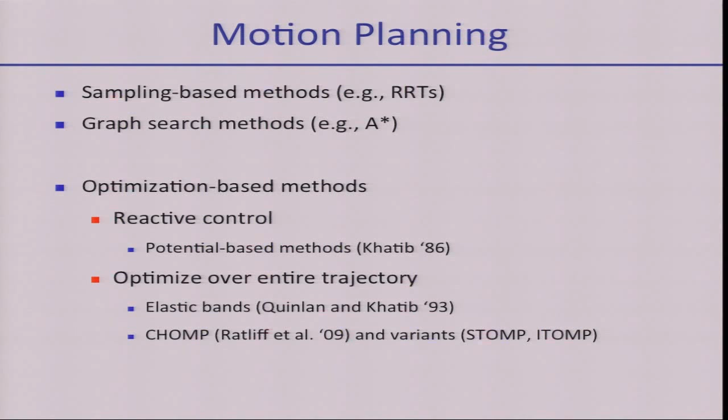So what do these methods look like? In the optimization, you minimize some objective, let's say path length, so the sum of the squared distances traversed at each time step, maybe some other costs.

Initially, your joints are in a start state. At the end, your joints need to be such that your robot is in the goal set. There are some joint limit constraints. And then for all robot parts and for all obstacles, there should be no collision along the path that you want to execute. This latter one is the hard one. This makes the problem non-convex and makes it computationally more challenging to solve this problem.

In recent years, there's been a lot of work on sequential convex programming. And the idea there is that you solve a non-convex problem by locally approximating it by a convex problem, solving the convex problem locally within a region, then updating your convex approximation, iterating over this until you reach a local optimum of your original problem.

The tricky part here is to incorporate the no collision constraints into these sequential convex programming methods. And so here's one way to do this. If you had one robot link and one obstacle, you could characterize the distance between them.

The signed distance is how far you need to move to get two objects out of collision, or if they are not in collision, how far you need to move to get them into collision. And you could then penalize as a function of the signed distance, where the penalty is 0 if two objects are a safe distance apart, and penalize more and more as they get closer to collision and even higher when they are in collision.

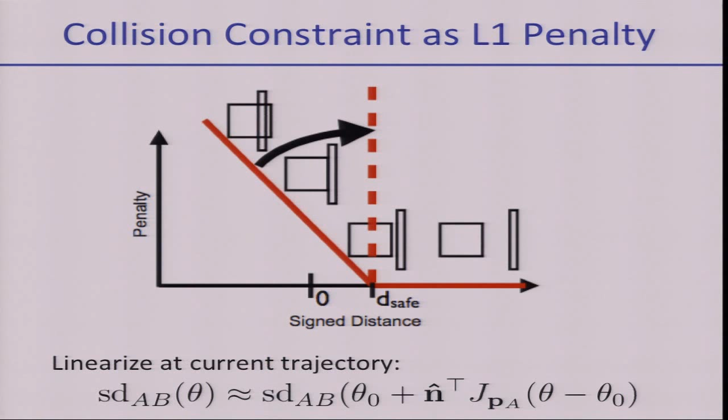If you want to account for collisions over time, so from time t to t plus 1, you could sweep out the volume that's being traversed by each link of the robot, and then do the collision check on the swept out volume rather than on the shapes at time t and t plus 1 separately.

It turns out that aside from this being better in terms of avoiding collisions over continuous time, it also turns out to condition your optimization problem in a better way, and you end up finding better local optima because now you're more fully considering the trajectory rather than a discrete set of points along the trajectory. So you really end up reshaping your trajectory as a whole.

Now, with these local approaches, of course, there are no guarantees. And so the way to justify that they might work well is to build up a benchmark where there's a large set of test cases and see how often they succeed within a certain amount of running time.

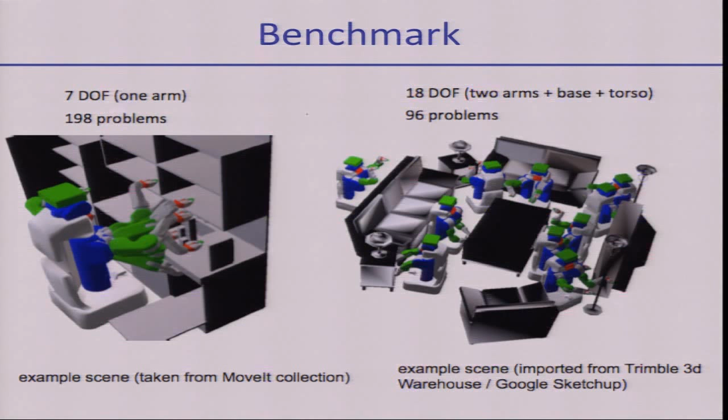So we set up a benchmark with PR2 being required to do a variety of motion planning tasks, and compared this optimization-based approach that we worked on, which we call TrajOpt, with some of the state-of-the-art methods, bidirectional RRT, and CHOMP, which is also an optimization-based method.

We see that with this TrajOpt local optimization approach, you can actually solve quite a few problems—in fact, more than with RRTs, if you're restricting yourself to a finite amount of running time.

We've done experiments with other robots than PR2, all in simulation. We've looked at the Atlas robot, 34 degrees of freedom. We've had successful experiments on box picking with a robot modeled after the industrial perception setup that Kurt and Gary had at the time, and also curvature constraint planning, such as you encounter for needle steering.

You can try this out yourself. The code is available, and not just the code, but also mini tutorials are available to work with this code. You can try it out on many different examples. So that's the motion planning part I wanted to talk about.

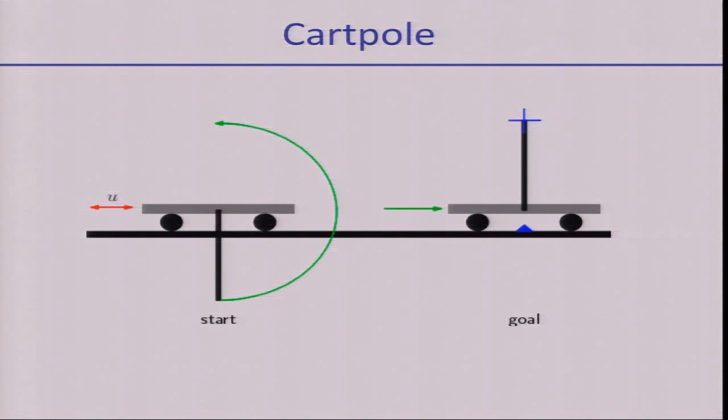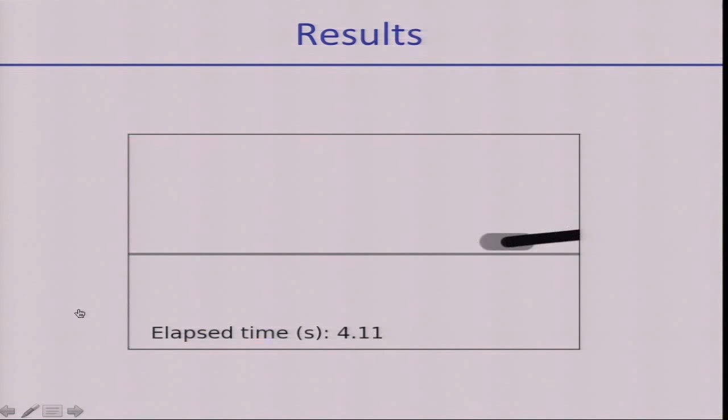If you run the algorithm described on the preceding slide, this is what you get. At this point, it's building up its model, trying to get to the goal. Optimistically, it always thinks it's going to get there, but actually doesn't.

But then after about 10 seconds, it figures out how to swing up and get to the goal. Here's a little more statistical information: if we do this over 10 runs, after about 40 seconds, each of these runs has succeeded. The reason this is not deterministic is because the first 10 seconds of the run, we apply stochastic control inputs.

So there's just a stochastic sequence of control inputs. Initially, things are random, and then from there on, it starts trying to find the best path to the goal under an optimistic interpretation of the current model.

Right now, what we're looking at is whether we can extend this computationally from 2 degrees of freedom to 6, which is what we would need to have a helicopter learn to fly on its own. Thanks.

Our next speaker is Konolige from, I don't know, are you still at Industrial Perception? I am at... Industrial, are? Perception. From Industrial Perception. It does seem to work.

My career path has probably been a little bit different from most people, and I know there are a lot of grad students here, so don't take this as a tale to be followed. You probably want to do things the inverse of what I did, which was to work at SRI International for longer than I care to think, doing mostly DARPA projects, which were very interesting.

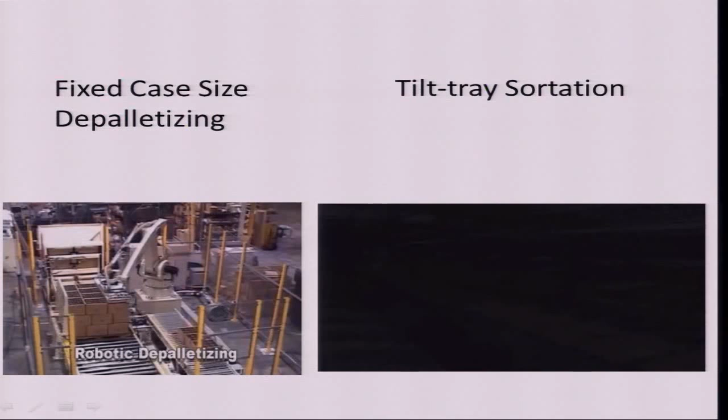For instance, this kind of depalletizing doesn't have any sensing—you just have to know that everything is actually there. The typical situation tends to have a lot of, for sortation, for instance, for trying to distribute packages, companies invest in these very large warehouse systems that are very inflexible, again with hardly any sensing going on here and certainly no vision.

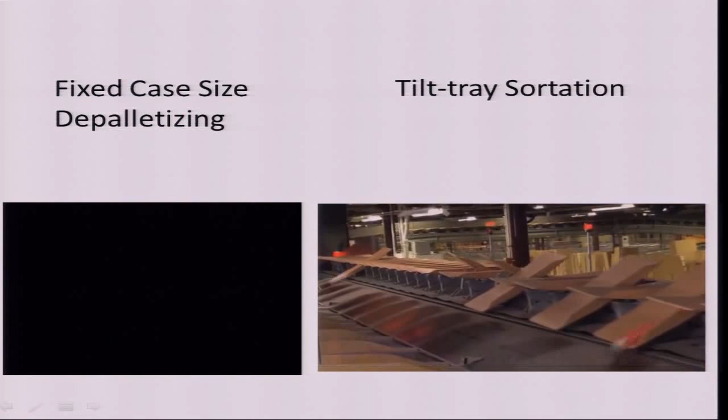So we looked around for applications that could actually benefit from vision, and we found really interesting ones. For instance, one of the largest uses of robots, and one of the first uses, was in welding for cars. But it turns out that every now and then the welding tip will hit something and get bent, and you have to try to figure out where it got bent to.

They currently use single laser break beams. It takes a while to actually do that. They tout 2 lasers as being a real advance in the field.

We figured we could just do this by looking at vision, and indeed, if you just look at that with a camera and take several images, you can pretty much localize where that welding tip is, and that's what that video showed. But of course, the venture capitalists would laugh at us if we came to them and said this is what our application is. In fact, some of them actually did laugh at us. It was quite funny. And we eventually settled on a different application.

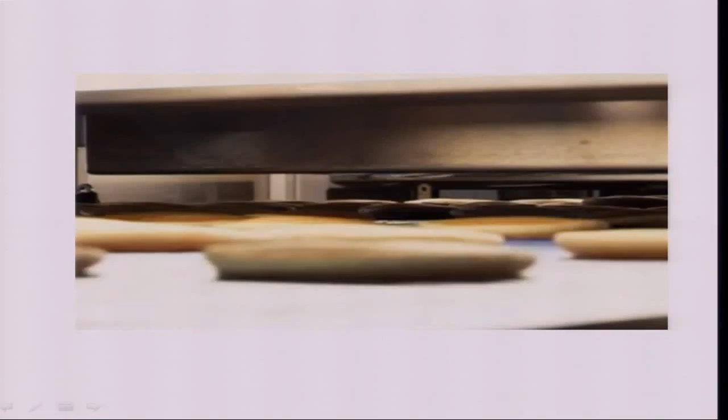But let me say first, it's not like vision and robotics aren't used in industrial automation. For instance, almost all your breakfast foods are handled by a robot at some point.

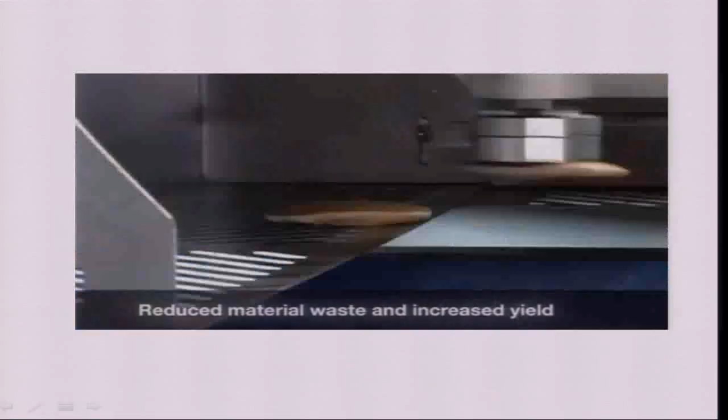So think about that the next time you eat pancakes. They're handled very well, but the kind of vision you get here is very much 2D. There are companies like Cognex, very large companies that do this stuff, especially for things like quality control, and they do really well.

So we realized there were other applications that were not so well controlled. We settled on doing box picking, trying to pick boxes from trucks. This is one of the videos from an early experiment we actually did. Here the environment is somewhat controlled - you're in a truck, you know you have boxes maybe of a certain size, but you still don't know quite where they are.

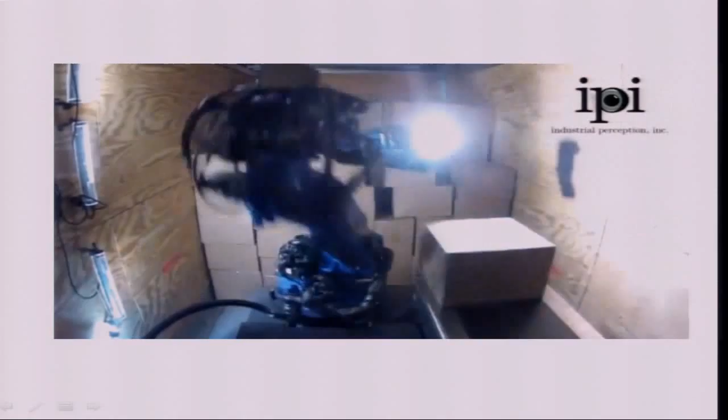In fact, we started out as a perception company trying to find the boxes so that another company, Wynright Robotics, a robotics integrator, could actually perform all the motion control. We just kind of throw the coordinates of the box over the fence to them. They would perform the motion control and actually pick up the boxes and put them on the conveyor. I don't know if you can see it, but the boxes shake every now and then. There's a lot of dynamics going on here that we don't really model, and probably should at some point.

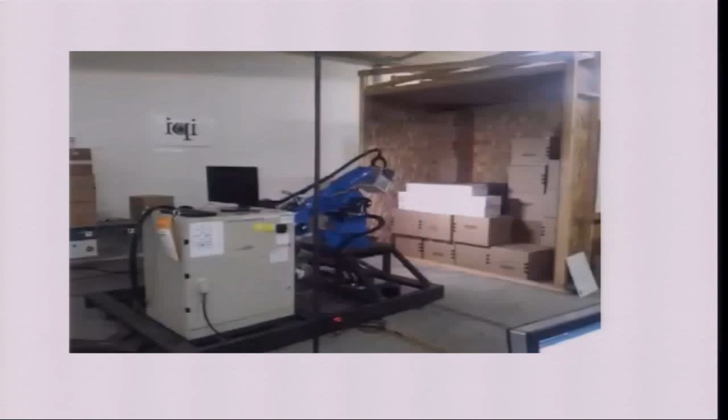We realized fairly early on that we couldn't just be a vision company. The reason is that the motion itself - if we want to get very fast, in industry speed is of the essence. You have to get down to about 5 seconds a box pick to make this actually viable. And if you just work with current robot technology, that big controller box right there handles everything.

Yes, this is our famous box throwing demo. You can find this on the web. You'll realize very quickly that robots can be programmed to go from point A to point B, but you can't tell them how to get there. There are very few ways that you can actually tell them to do that kind of thing.

So very quickly we learned that we had to take our perception, and if we wanted to be efficient, we had to pair that up with motion control - both for active vision, for finding where we wanted to look, and also for making efficient paths that would let us go around. So over the last year or so, we've had to actually do that part of robotics, and we've teamed up with Pieter's group and John Schulman in particular to help develop some of the motion control and optimization of trajectories for robotics. That's been a very interesting journey.

Unfortunately, we can't be 99% sure of these things, or 98%, because if you actually have that robot knock into something, then of course you're screwed. So the requirements for industry are quite a bit different.

So there are a number of things that we actually needed to do. First of all, we needed to take 3D seriously. In this kind of environment, if we don't want to hit other boxes, if we want to be sure about our trajectories, we have to have a full 3D model of the environment, and we have to constantly update it at the same time. So we had to really take that seriously.

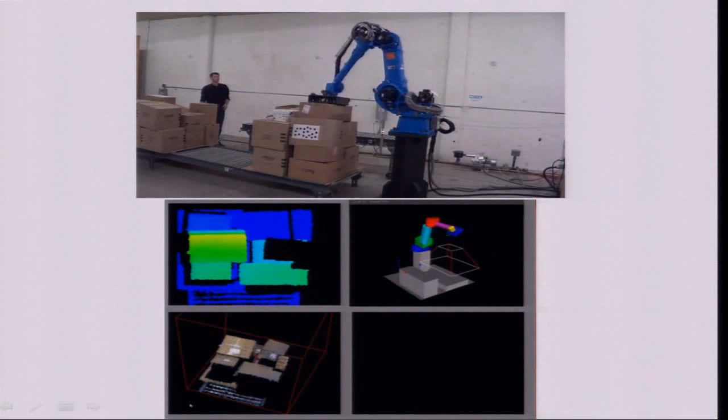So here's one of the first applications where we actually looked at taking seriously the notion of 3D and update of the 3D model.

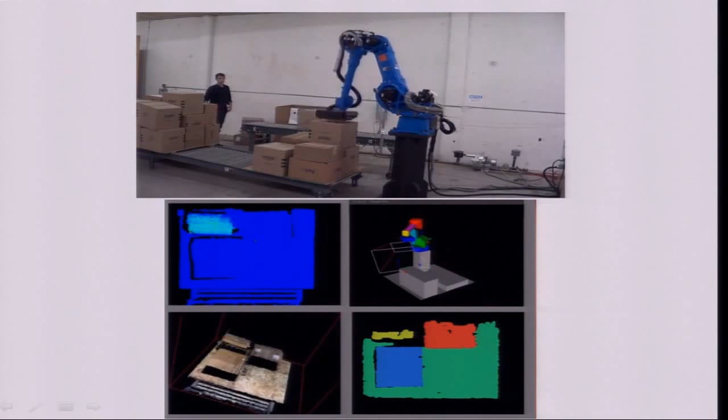So you can see it's a very simple model, and we're just using a camera on the end effector of the robot to update that model in depth and find the next box as we go through a cycle of picking this up. It actually showed that we could pick these pallets with boxes of different size fairly easily and fairly quickly.

The only stops that are actually in here are because we're using a Kinect-type sensor, and if you move while using a Kinect sensor, you're going to have a lot of motion blur. That's a real problem in getting cycle time down fast, because you don't want to have to make those stops to settle down.

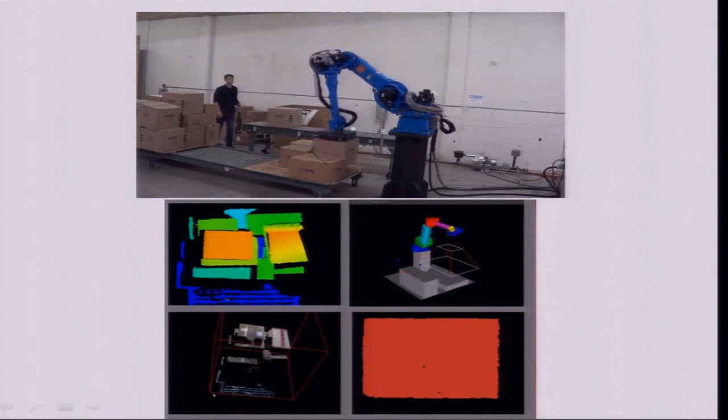So we've had to overcome a lot of these different problems, and part of that led up to our current system, which is able to do full volumetric modeling of the environment, update that in real time, do more precise localization and volumetric rendering for actually finding boxes. There's a couple boxes that are somewhat hard to find, and we do that all in real time while still enabling us to pick in these very tough situations.

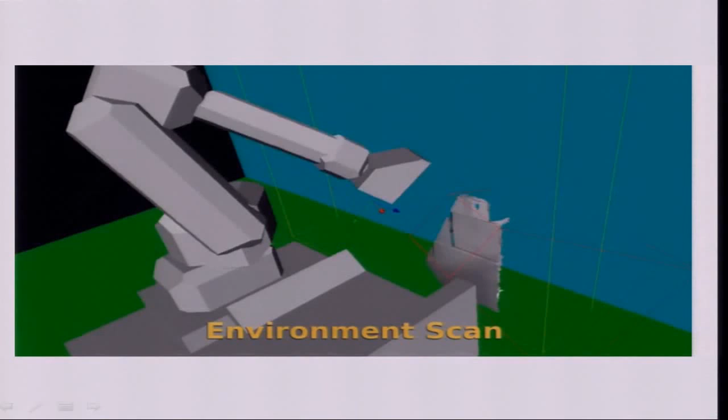So here's a little bit of an idea of what the robot is actually thinking. As it scans the environment with a depth sensor on the end of the camera, it's building up that 3D model. So now we can use this to do collision detection. How to do that in real time is actually really still difficult, but it involves...

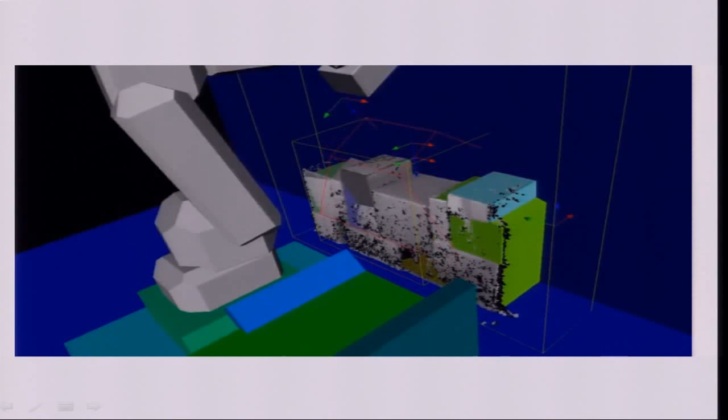There are no questions allowed during these talks.

It's a magic sensor. You can come talk to me afterwards, and I'll talk to you about it.

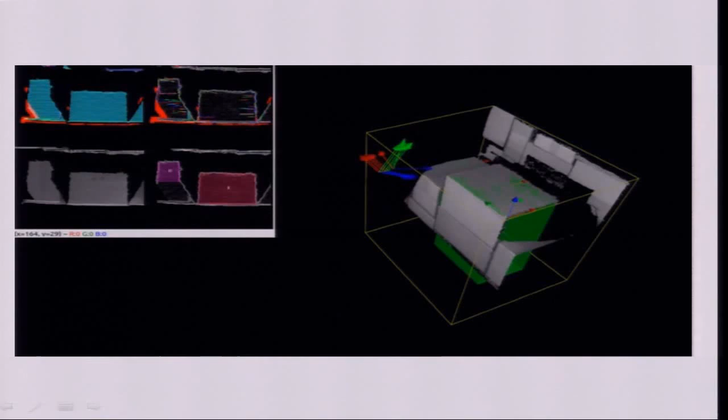So you can see it building up the environment. I'm not going to have time to talk much about this, and I urge you to go on the web to find some of these videos and see what else we're actually doing. Okay, thanks.

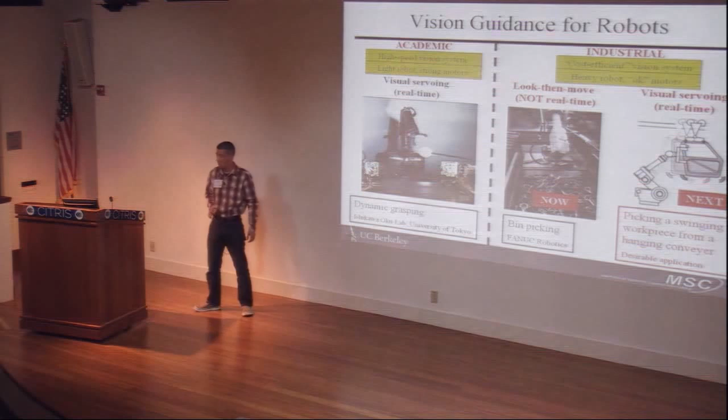So to implement real-time vision guidance on industrial robots, basically we need to consider two parts of dynamics. Control is always about dealing with dynamics. Of course, we always have robot dynamics. And another dynamics we have is the so-called visual sensing dynamics, or VSD, which mainly includes latency and slow sampling.

Talking about latency, usually a common vision system used by industrial robots gives that kind of latency, whereas we're talking about at least a 1 kilohertz controller rate.

It is not an image camera. It requires markers. And it gives you pretty fast response and sub-millimeter precision accuracy, with a considerable measurement range, like half a meter by half a meter. And the pro is it's really, really affordable.

If you're trying to buy something like that on the market nowadays, it costs you around $100K US. Examples include Optotrak from Canada, whereas our system, I believe, gives a cost lower than $1K US. But the problem is it requires markers.

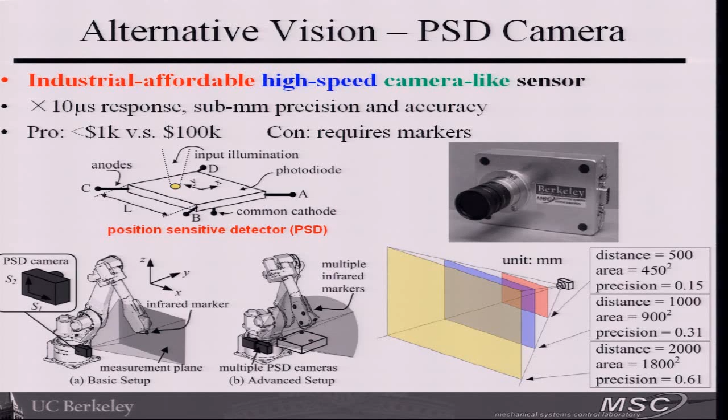So what if markers are not allowed? What if manufacturers don't have time to attach markers on their workpieces and tools?

We have to deal with visual sensing dynamics directly with some sort of smart algorithms. In our controller, we have this dedicated block that compensates for the latency and slow sampling coming from your cheap camera, so it's compatible with your 1 kilohertz controller. In visual sensing dynamics, we have three things.

Noise, which means we need to use some sort of statistical algorithm. Latency, which means we need to predict. And slow sampling, which indicates multi-rate algorithms.

Nowadays, my colleague has developed a series of algorithms based on various learning methods, which is really marvelous. But basically, most of those algorithms predict today by reading newspapers from before yesterday, by learning some sort of model.

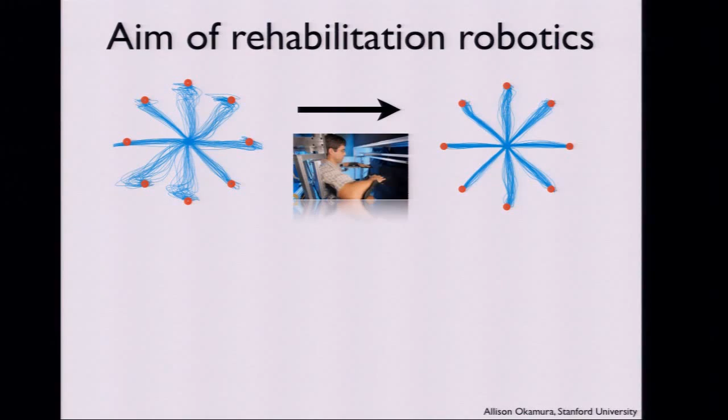The larger goal of rehabilitation robotics is: if you have someone making irregular and variable movements, somehow using a robot, either as an assistive device or as a rehabilitative tool that would only be used temporarily and then taken away, could eventually produce nice, smooth movements like controls or healthy people do. In the long term, you'd love for these rehabilitative tools to transfer recovery to activities of daily living, to be used at home as orthotics or rehab devices.

Ideally, you don't just want some specialized strategy that helps people, but you want to truly help them learn and correct their behavior at a fundamental level. To do this, we need really good models and an understanding of the patient deficits.

A lot of the rehab robotics field is about building devices that move people's arms around in a way we think might be helpful. But to be truly helpful, we postulate that you really need to understand the deficit.

In this talk, I'm going to talk about using robots to help us understand the deficit, specifically for people who have damage to the cerebellum, which is a part of the brain located back here.

It's thought by researchers to house an internal model of the body's dynamics—my limb segment lengths, inertias, maybe damping, etc.

This is thought because if you take a healthy person and ask them to make a quick reaching movement, one so fast you can't use peripheral feedback, which takes about 150 to 200 milliseconds for proprioception or vision, requiring a feed-forward motor command from an internal model, a healthy subject can do this task pretty well.

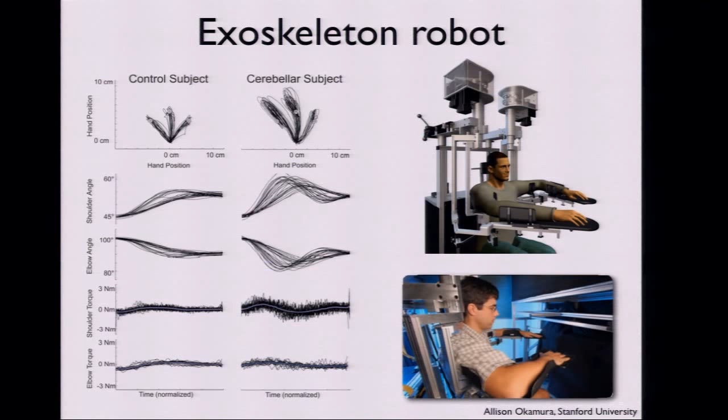So a control, healthy subject might make movements like this. This is spatial, and then this is the inverse dynamics, getting all the way down to what we think are the torques in the arm that resulted in those movements. We can also do this for cerebellar subjects. The interesting thing is it definitely seems to be dependent on where you move in the workspace, giving more evidence that this probably has something to do with the body's dynamics.

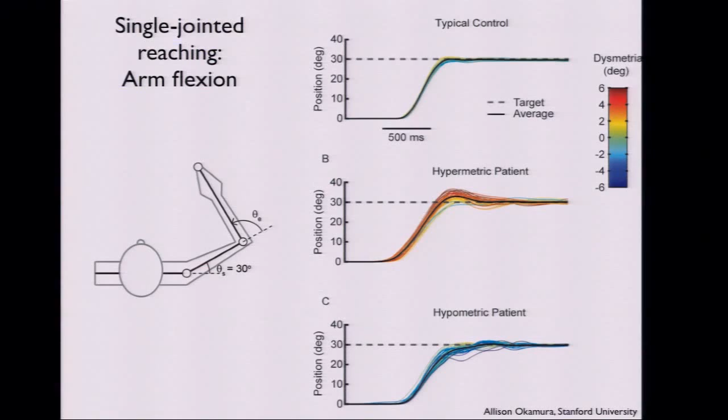So we tested people in a very simple single joint flexion task, moving the arm in and out, and we get data like this. If we're just looking at position, this angle in one degree of freedom, and you're moving up to this target line, control subjects can do this very well.

The interesting thing, and this has been a mystery for decades, is why some patients with damage to the cerebellum overshoot as they try to hit the target, whereas others undershoot. This hypermetric patient overshoots and oscillates, coming back in this sort of weird underdamped behavior. A hypometric patient has a different type of dysmetria: they undershoot, and then finally recover and can get near the target after a little bit more time.

So we would like to understand this more deeply. One thing we would like to do is take healthy people and see if there's something we can do to them with a robot that can make them look like cerebellar patients. And we were able to achieve this by trying to mess with their body's dynamics.

So we would have healthy people make these reaching movements, and then we would use the robot to suddenly change their inertia, increasing or decreasing it. And we weren't sure that inertia alone was the problem, so we also tried viscosity, stiffness, and some other things.

Now with a healthy person you can only do this once, because if your brain can adapt to these deficits the robot is introducing, you won't get much good data after a single reach. But for these single, unexpected reaches, we actually get this variety of hypermetric and hypometric behaviors from these perturbations. And it looks like these are very similar to what we see in cerebellar patients.

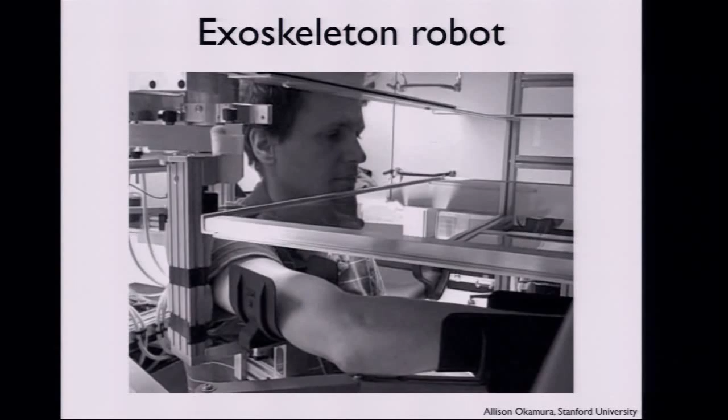We basically do inertia rendering on the robot, which is challenging because you're trying to get the device to output torques, which are a desired inertia multiplied by an acceleration measurement. There are interesting signal processing issues in trying to render these inertias precisely, but we have to do it in order to render the correct inertia to change these deficits.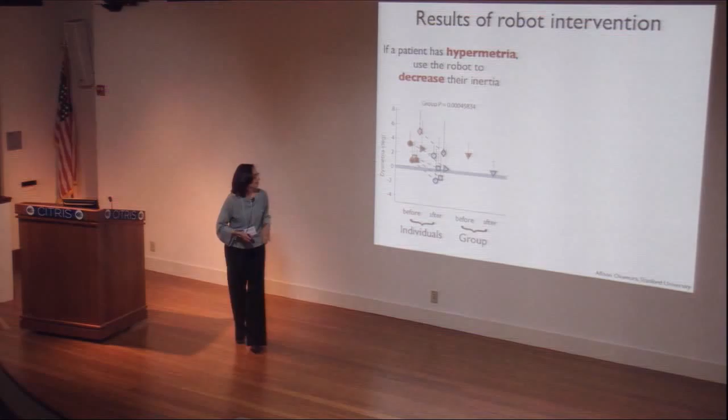Hypometria was the case where you were undershooting, and this actually works there as well. Their dysmetria was higher before and we can correct it, and the group data does pretty much the same thing. So it's interesting that we could apply this general idea to patient populations whose behavior was quite different in terms of the type of error they got.

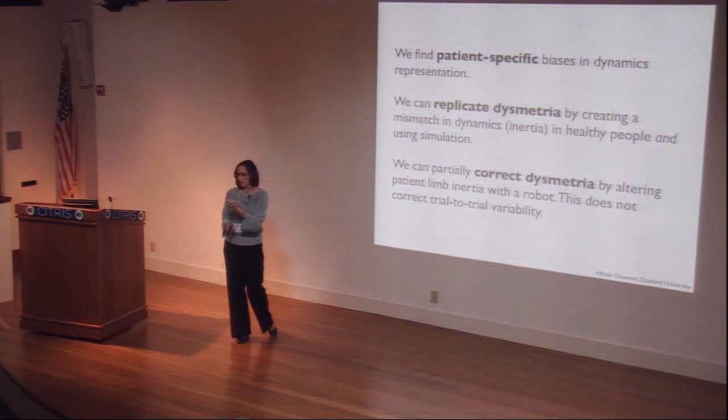The punchline results are that we can use patient-specific biases to represent their dynamics and understand them. We can replicate this dysmetria in healthy people using a robot to perturb them, as well as in simulations. We can also partially correct the dysmetria by altering a patient's limb inertia using an exoskeleton robot. This is exciting, but of course this is only scratching the surface. It doesn't correct trial-to-trial variability, and variability is higher in cerebellar patients than in healthy people. That's still a challenge we're working with.

The big picture here is that, like surgery or any other robot-assisted intervention, in rehab robotics we should be able to quantitatively describe a patient's state in order to generate a model, so we can plan intervention, design robotic systems, and incorporate human inputs into them.

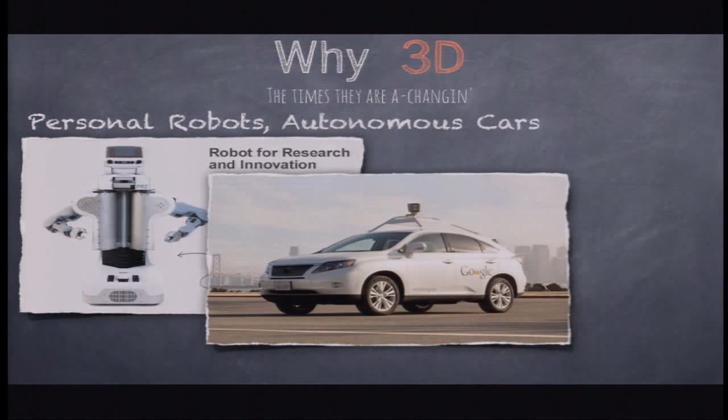A little background. I'm going to start with why do we care about 3D, and then move into what is the point cloud library. So why do we care about 3D? Well, times are changing. Personal robotics is on the rise. We've got cars driving themselves. And wearable computing is also coming. All of this means that 3D visualization and handling is going to be increasingly important in the next few years.

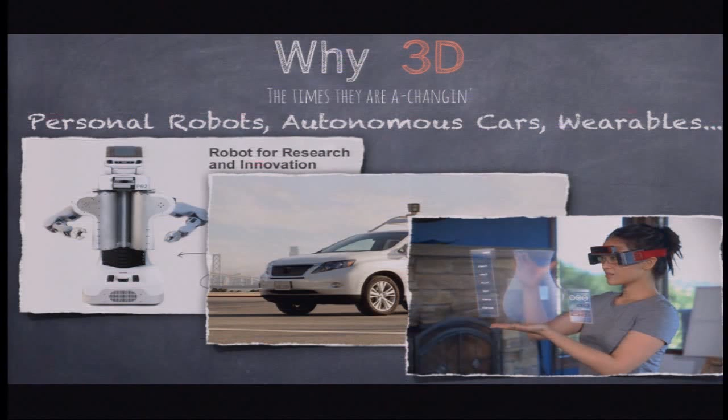Also, because 2D alone might have failed us - and that's not to be mean to the people who have done great research here. But if you look at something like Google Goggles, a great company doing great work in 2D, the public just isn't convinced by it. And that's not surprising, because it's really hard to solve the 2D problem.

Lighting invariance is very difficult. Mapping texture as opposed to shape is a big problem. And even some of our best algorithms in tracking, without the ability to do geometric verification, are going to find mugs out in space. When you just have edges, that's what you have to work with.

And even the algorithms that are tried and true will still fail sometimes. Also, I think 2D is just hard without semantic understanding, a little ill-defined even. For instance, without depth perception or a really good understanding of how humans behave, you just can't work with this.

Also, being biologically inspired isn't always the best way to go when we're working with a robot here. So I know humans use mostly monocular, a little bit of stereo. But if we have these sensors, we should work with them.

Also, because this is a convergence of a lot of fields right now. So we've got new sensors coming out - PrimeSense, Intel, gaming and mobile. And pretty excitingly, a lot of these will be embedded in a phone very soon. They're working on camera arrays, passive stereo, and we're going to have to deal with this data.

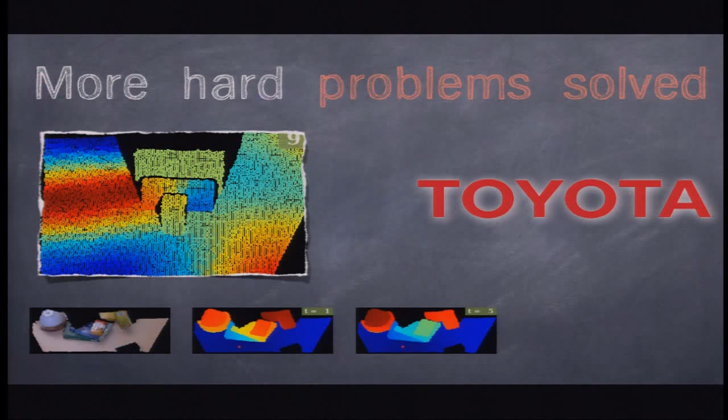And finally, we've been working with NIST to try to do multiple human pose tracking. So this is with a mounted Kinect sensor, just trying to follow people, again, with heavy occlusion. And this is still ongoing work. So I think I'm a little short, but you should come join the movement at pointclouds.org. It's a great library, and we need your help.

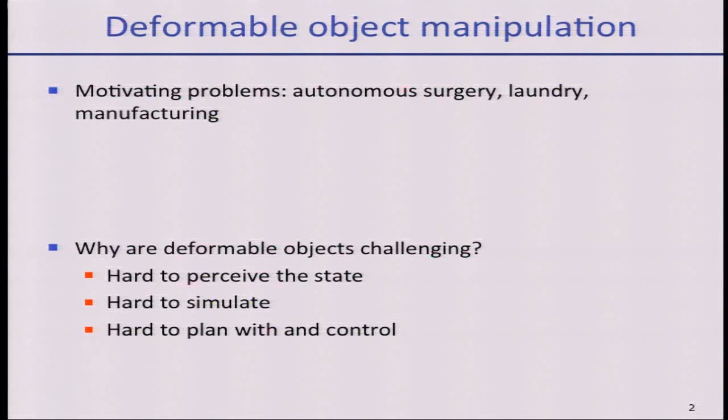So my research has addressed a few aspects of this problem. I did some work on tracking deformable objects and then high-dimensional motion planning. But the next few minutes of this talk will be about learning from human demonstrations how to autonomously do a manipulation task.

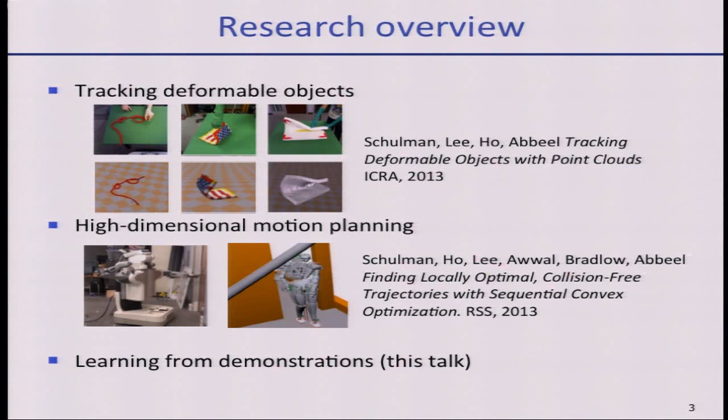So what you can do is first find correspondences between the points, and then think of those as samples. You have a function, a nonlinear coordinate transformation that maps from the training scene to the testing scene, and you have a few samples of that function. Basically, we're going to fit a function that maps the whole space of the training scene onto the testing scene.

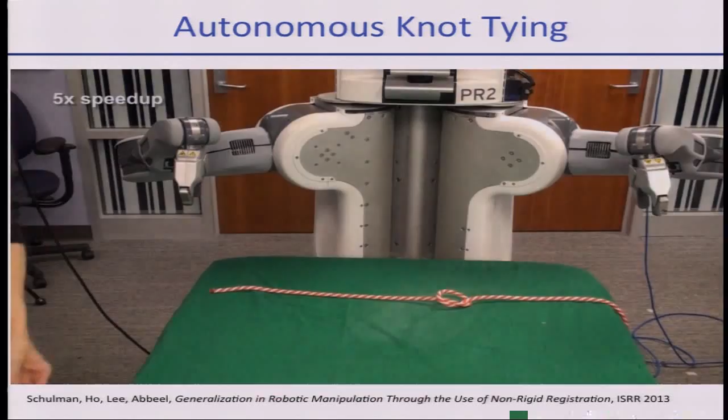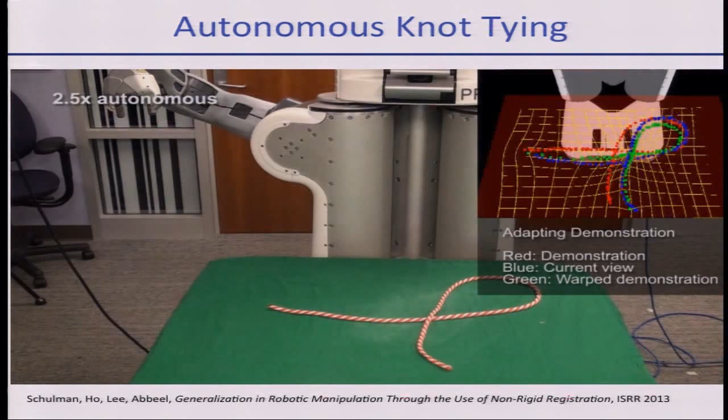Three stages there. Now the rope is laid out in a new configuration, and the robot's going to tie a knot autonomously. At each stage, it looks at the rope, gets a point cloud, and does non-rigid registration, meaning it finds the function that maps the training scene onto the testing scene. It does that three times, once before each step, for the overhand knot.

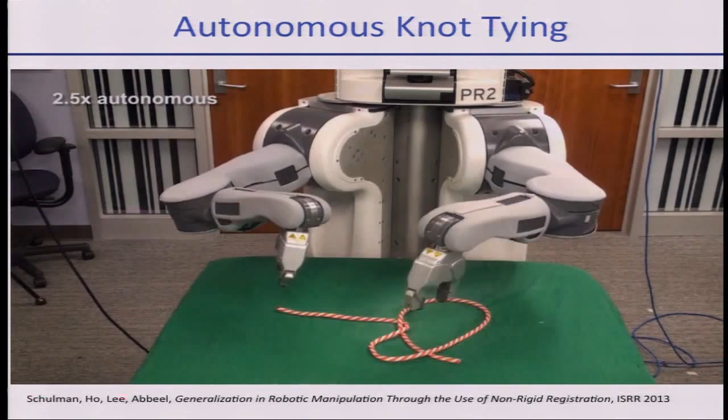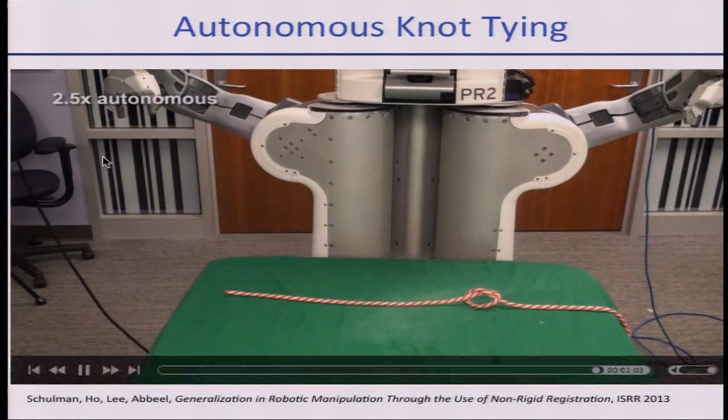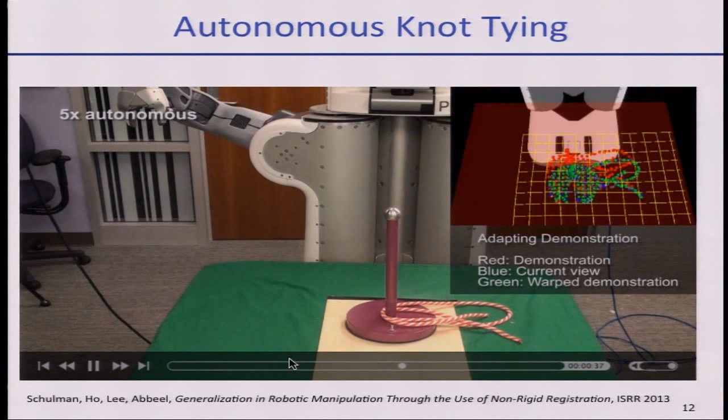Here's a slightly more complicated knot. Same algorithm, exactly the same, just with a different demonstration. This is all in 3D, even though it's just showing it in 2D. With the rope, only 2D is relevant, but this also works in 3D.

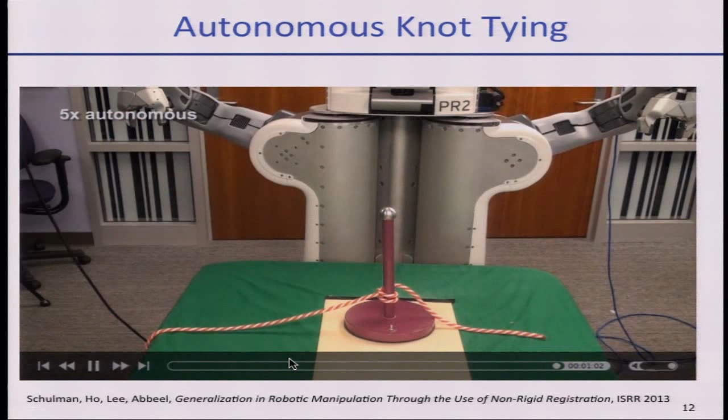All right. Thanks for your attention. Thanks, John.

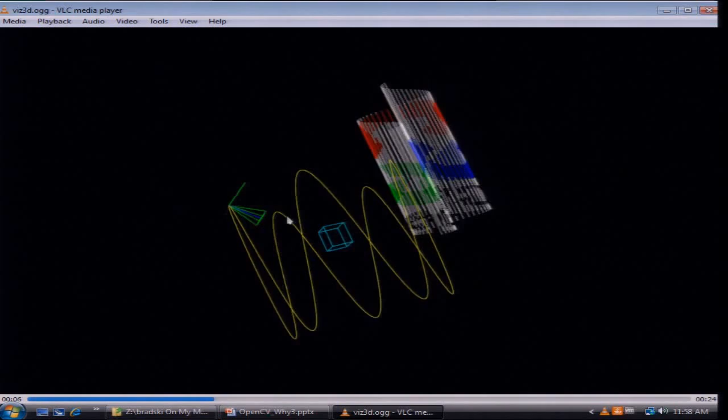This is the visualizer for structure from motion, so it's following this sinusoidal arc, and you're able to view this. In this case, he's just making a camera path. So these are some of the things that came in.

And hopefully that one's not. This is the Python tutorials, complete tutorials. Maybe I can speed this one up as we're running out of seconds.

And I wanted to get to this segmentation that was developed by Malik and his group. So, very human-like segmentation.

So that's all in there as of now. You can get it on Git. That's it. Thanks, Gary.

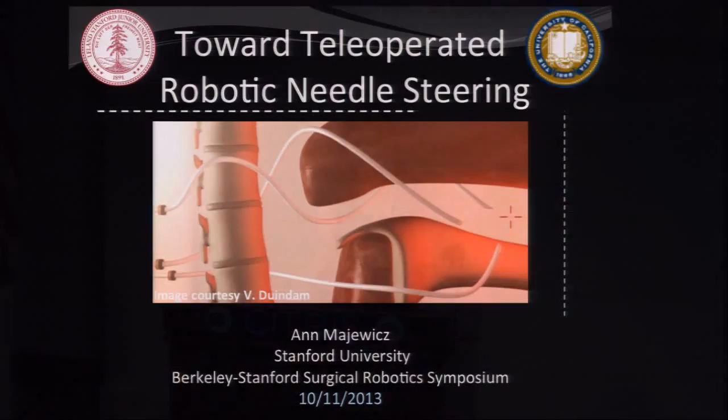Hi, I'm happy to be here, especially because we've actually collaborated a lot with people at Berkeley on the needle steering project. My name is Ann, and let me just start with a little bit of motivation for steerable needles.

The motivation is that straight line paths don't always exist to targets within tissue due to obstacles, such as in this case, we have a little vessel that's blocking the path. So steerable needles could be used to steer around these obstacles.

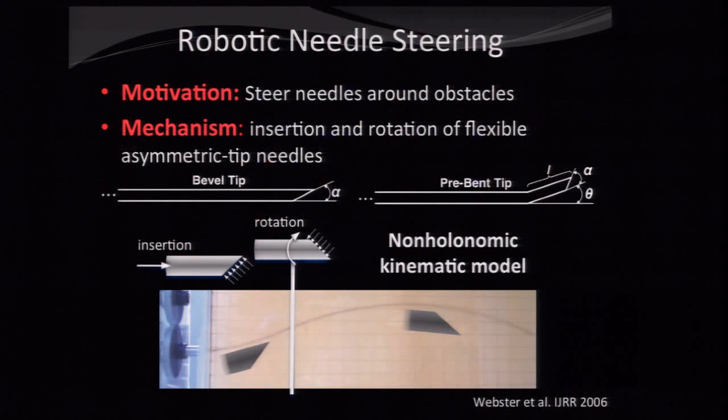So we use long, thin, flexible needles with asymmetric tips. As the needle inserts, it deflects due to asymmetric tip forces. Then we can control where the needle steers by rotating the needle. We can actually model this behavior as a nonholonomic system, such as a unicycle.

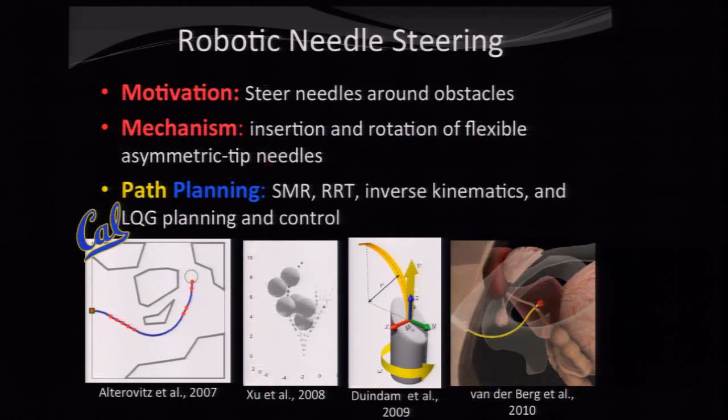We collaborated closely with people here at Berkeley, particularly Ken Goldberg's group, and they've contributed a lot to path planning algorithms that enable autonomous needle steering. However, there are several challenges with autonomous needle steering, namely limitations in terms of medical imaging, dynamic intraoperative environments which can cause the operative plan to quickly change, and finally, how the tissue feels is actually a critical feedback mechanism for the surgeon to detect what kind of tissue the needle is in. And so for these reasons, we think it's important to have a surgeon in the control loop.

We're proposing to do this with a teleoperation strategy using a haptic device like the Phantom Omni. And so we considered two possible teleoperation strategies.

The first is having the user control the needle inputs, insertion, and rotation, and this is called joint control. However, we actually thought this would be kind of difficult. Just imagine how hard it would be to parallel park a car in 3D. That's sort of what this would be like.

So instead, we proposed another method where the user controls the needle tip directly, and that's what we call Cartesian space teleoperation. Our method works by iteratively planning constant curvature paths to connect the user desired position to the current needle tip position, and then steering the needle along that path.

And because we're using a haptic device, we can give force feedback to the user so they can feel the kinematic constraints, and we might also be able to play back the tissue so they can feel the tissue as well. So here's a video of a user teleoperating a simulated needle using Cartesian space teleoperation.

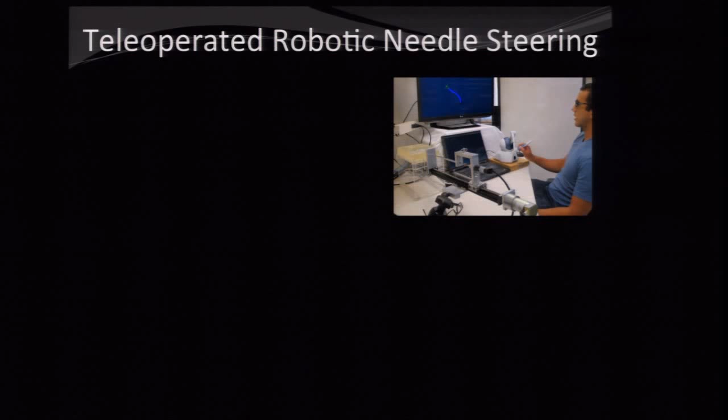So to implement this with a robotic system, as the user moves the haptic device along the desired needle path, we iteratively define constant curvature arcs between the needle and the user desired position. And the needle position and heading can be found using a 6-degree-of-freedom electromagnetic tracker.

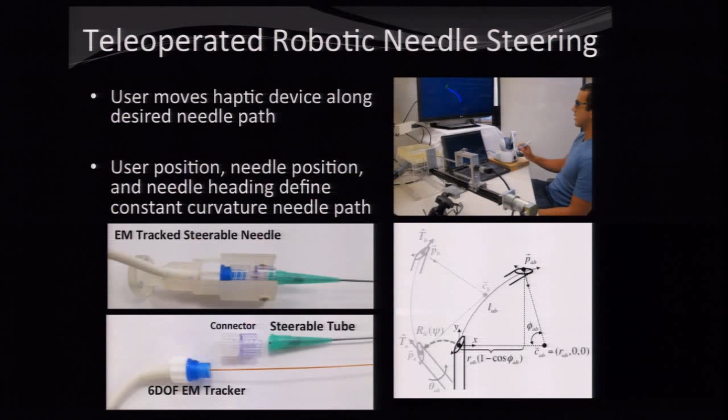Then we steer the needle along that path by first rotating the needle to the steering plane. The needles steer in 2D. And then control path curvature with something called duty cycle spinning. And then we repeat this process until the user stops moving.

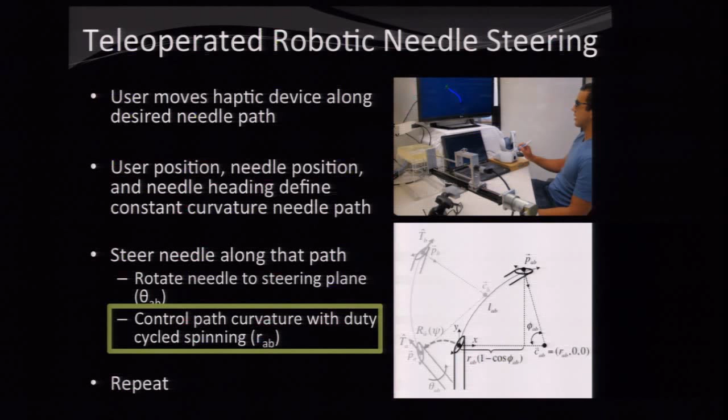So now let me talk a little bit more about how to control the path curvature. In duty cycle spinning, the needle path curvature is controlled by alternating between pure insertion with insertion while continuously spinning. There are two issues with this method. One, which I won't talk about due to time, is that there's inherent error that propagates over long insertions.

The second, very practical issue is that you actually can't use sensors that have cables because the cables will wind up. So we proposed two different methods that don't require continuous spin. One, as the name implies, bidirectional duty cycle spinning, means that we alternate the direction of rotation, either... actually, let me turn this up so you can hear it.

Let me see if I can play that again. So basically, we just alternate the rotation direction, either clockwise or counterclockwise.

And the second method, duty cycle flipping, is basically where the needle inserts in discrete steps, either facing left or right. And then the duty cycle ratio is a function of the time inserted facing left versus the time inserted facing right.

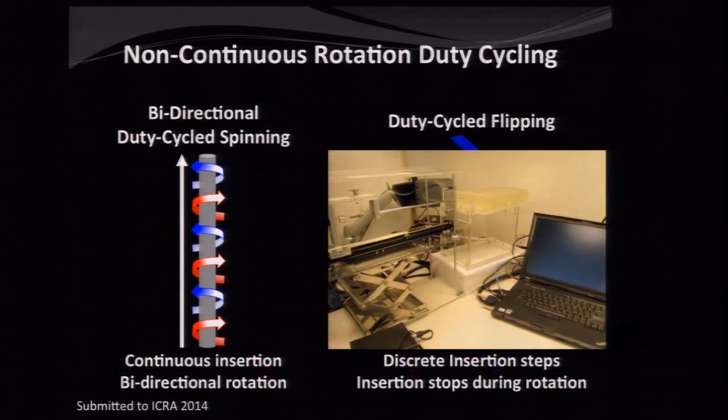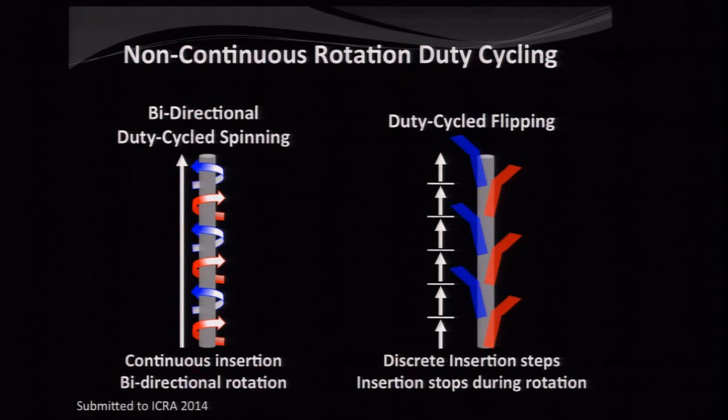We evaluated our algorithms in a paper recently submitted to ICRA. I took out the slide due to time, but I realized I didn't need to. Talking fast, sorry. So basically, we found no difference between the two methods, except that duty cycle flipping has higher insertion force variance, while bidirectional spinning has higher insertion torque variance. That's going to be an issue important to address as we think about implications for tissue damage moving forward. So, thank you.

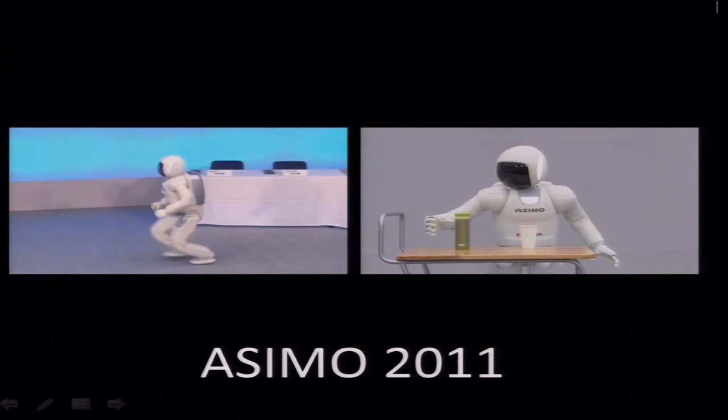So think about this task. In fact, Honda demonstrated this task in 2011, and just programming this task would take over probably 2, 3, 4 weeks of adjustment of all the gains, all the positions, every aspect of it to be successful. And if we change anything in that environment, everything is going to fail.

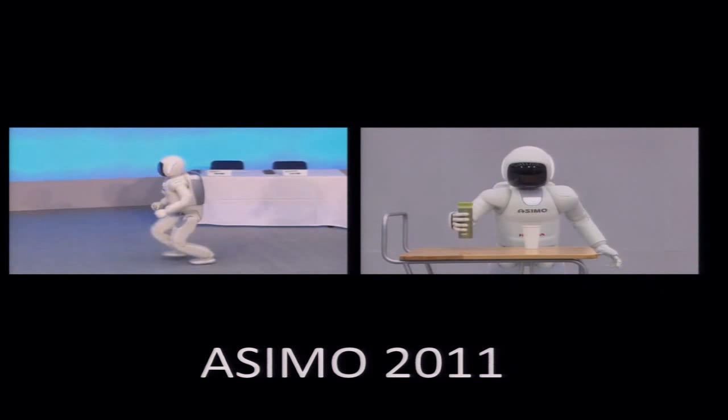Manipulation has been a big challenge in robotics over the years. And in terms of humanoid robotics, it's going to be more and more challenging unless we really work on that problem. So interacting with the world, going beyond manipulation and mobility, and building a framework where we really integrate the whole body, mobility and manipulation, is a very important thing.

So the question is not to take a humanoid robot and try to teach it how that specific robot can perform that specific task. The question is to understand skills independently of the robot, how we can understand a skill, what is a manipulation skill, how we can build that skill, and then map that skill to a platform, a robot, a humanoid robot.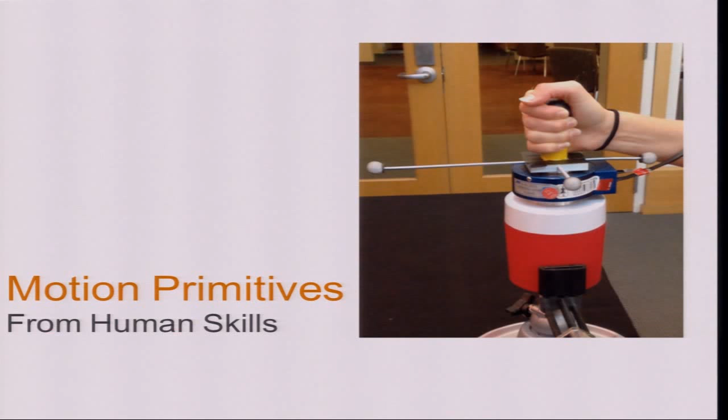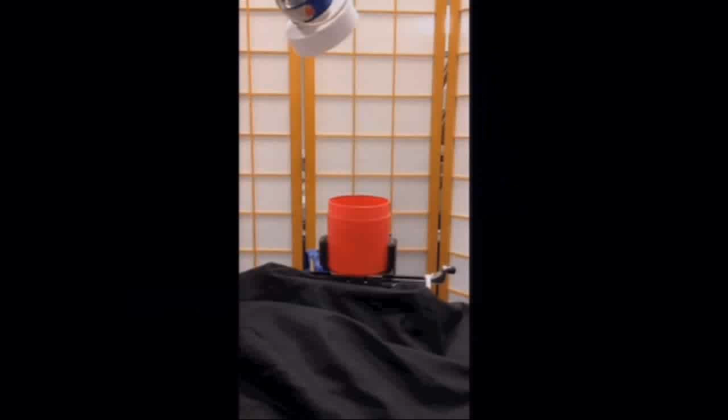So humans are amazing as a model for us to think about skills. One thing we can do is take a task and have it performed by a human, record and motion-capture the motion, look at the strategy, look at the forces and movement, and essentially extract the strategy, extract the compliant frame, extract the center of compliance, and then have a strategy to implement autonomously on the robot.

So this is the direction we are exploring. This is one of the directions. There are a lot of things that could be done haptically. Haptically, we can interact with the environment by controlling the robot. And now the robot is almost autonomous—we are just controlling a few degrees of freedom of that robot.

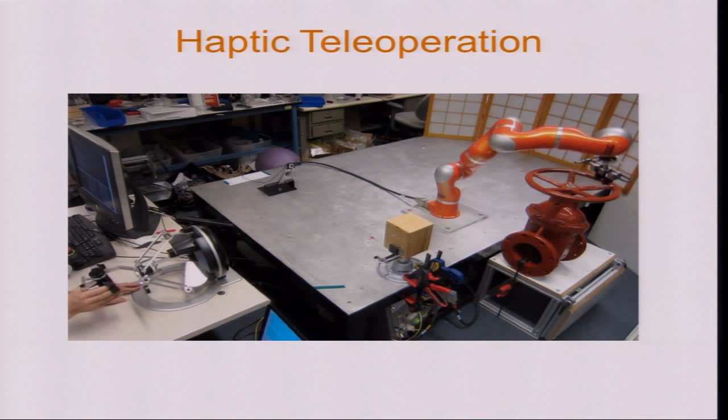So the skills for manipulation are critical. And if we map them to humanoid robotics, now we have a much more challenging problem, because these are systems with many degrees of freedom. When they touch the environment, they will touch it at multiple points, and there will be a lot of internal forces, a lot of balancing questions, and how are we going to control them?

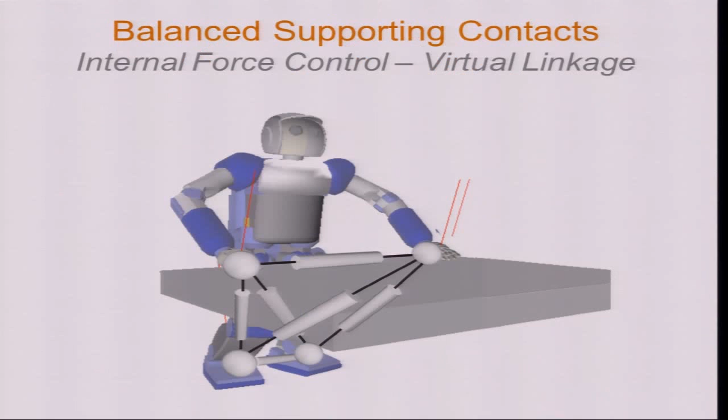Are we going to do inverse kinematics? Is it reasonable to think about inverse kinematics and programming all the different motions for every task? It would be impossible. So we need to understand the model, and think like what humans do. That is, we have multiple tasks we are achieving—we're performing a main task, we are maintaining a posture, our posture will not interfere with the task, and both will not interfere with any constraints from the environment, like contact. Everything should deal with the idea of internal constraints and obstacles and all of those.

Don't forget balance. Now, if we want to do this, it means we have multiple different operators running, and those controllers are autonomous and running separately, but we are merging them through this consistency. Consistency is a sort of projection in the null space of the task, or of the posture and all the constraints, and that leads us to merge and build a controller that is coherent between the different things.

What is interesting about all of this is that it ends up being a very simple point, one single point. All what we see here will result in one single point in high-dimensional space representing the constrained, consistent motions, where all the different parameters related to the constraints are taken into account with the contact and the task. So when implemented, you can see an example here.

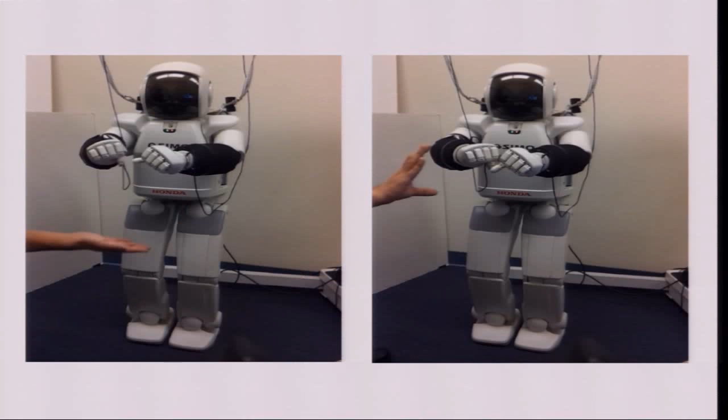And here we are teaching the robot where to reach in order to grasp a specific object. All of these are just examples. So here is an example of constraints. You remember potential field, but now potential field put in the context of not fighting with everyone else, avoiding the collision, and performing a task that maintains all these coherent controllers.

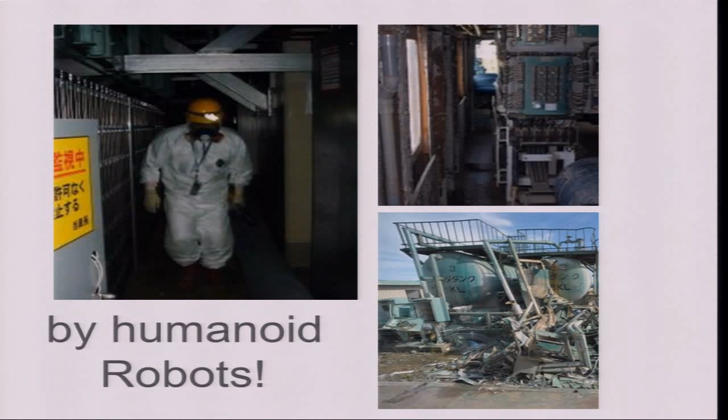Now, let's think about where we can take humanoid robotics. Is it really useful for anything? One thing I think would be amazing is if we could get this human to be replaced by a humanoid robot. Why? Humanoid robots bring this compact mechanism that has mobility, manipulation, vision, computation, sensing, all together in a confined space, so that we can go into these narrow passages.

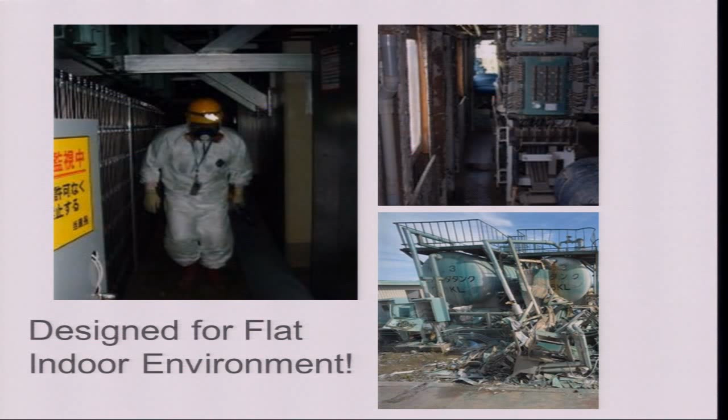The problem is humanoid robots were designed for flat indoor environments. They were not designed for a three-dimensional environment. So how can we deal with this problem? The only way we can think about it is: let's touch the environment, and let's not just ZMP ourselves walking on the flat floor. Let's move using the environment. This idea requires a lot of attention to internal forces, control, and coordination between different things.

Here is an extreme motion that you can see, detecting friction, detecting the slippage, and even moving the ground under the robot, and still we are balancing and maintaining all of this. Once we have the proper controller and proper sensing, it is amazing what can be done.

Now, not every time do you have the environment to help you. How can we move when the environment is not helping? Well, let's make something that will help us move in that environment. This is the concept of the supraped. The supraped is to bring an extension of the support for the robot. We showed that we can do over 400% support.

Now you can see a robot here. This is HRP4C moving in an environment where the robot is detecting, because these poles are smart and have sensors. In fact, we're working with Mark on building such a pole that will provide that feedback and information. In the meantime, we developed the controller, detecting the friction, detecting the contact, and taking all of these things into account.

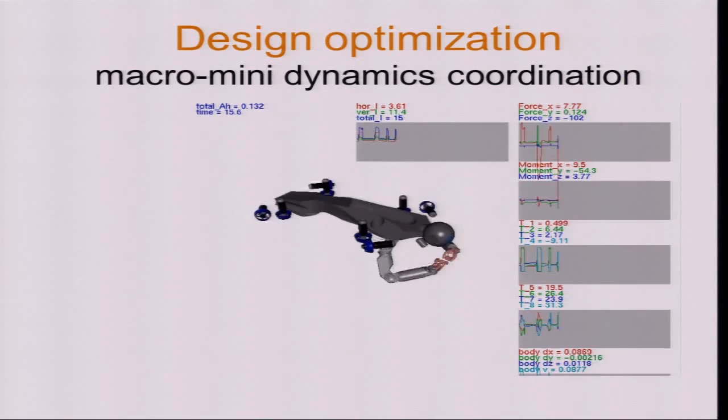Through fast communication and through the use of dynamic interaction, we are going to be able to perform those motions. We are developing this project. We are building the different simulations - this is full dynamic simulation, controlled by the human.

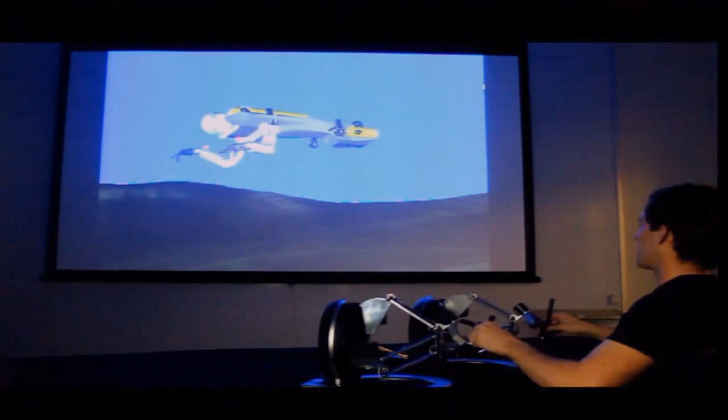And in the 5 seconds that is left, I'm going to show you a video made for space.

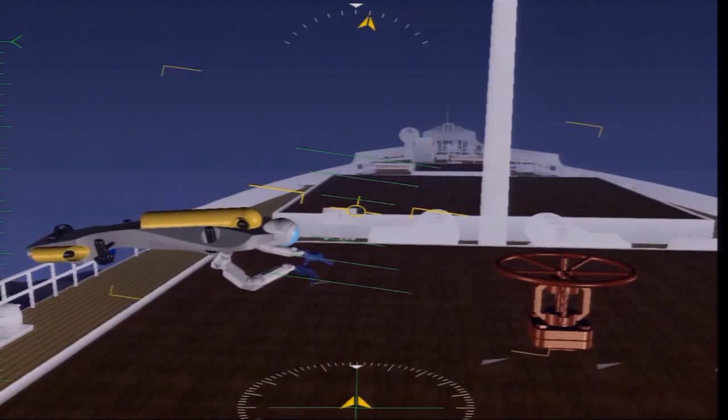The reason I selected this music was that I was invited to a workshop on space robotics, and I was talking about underwater robotics. They share a lot of commonality in terms of control, navigation, and flying.

These are real dynamic simulations with real control in the water model.